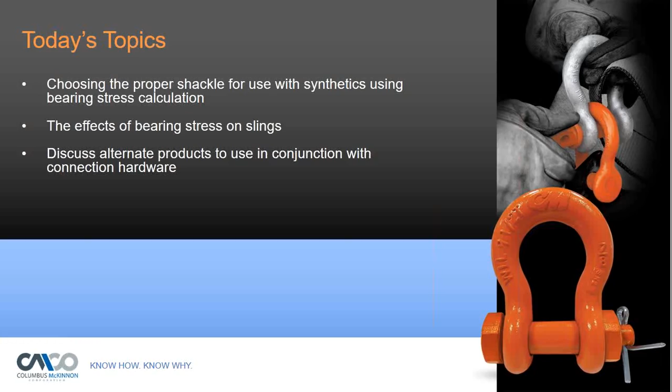Today we're going to go over choosing the proper shackle for use with synthetics using bearing stress calculations. We're going to review the effects of bearing stress on slings, and we're going to discuss some alternate products that you can use in conjunction with connection hardware. And most importantly, before you make any lift, we're going to go over some pre-operational inspection criteria and removal from service criteria per ASME standards.

Again, this information is intended for general purpose. None of this is a substitute for any of the government regulations or ASME standards. It's not our opinion. If you have any specific questions, we can definitely assist you and guide you to the right regulations or standards that would apply to that, and we'll be more than happy to help you out with any of those situations.

So for our sampling today, to do bearing stress, we're going to use a synthetic round sling, polyester round sling, and a shackle. Two commonly used rigging products that will be used for a standard lift. So with anything, it's very important that you do your pre-operational inspection. Per ASME B30.9-6.9.5 is the removal from service criteria for round slings.

What we like to see in the industry is prior to each use, the slings and hardware shall be inspected before they're used. So this is a good thing. So if you run out to your truck or you grab stuff off the crane, you want to make sure you're giving this gear a good look and a once over to ensure that it's safe for you to use, that it's free from damage and the lift can be made safely.

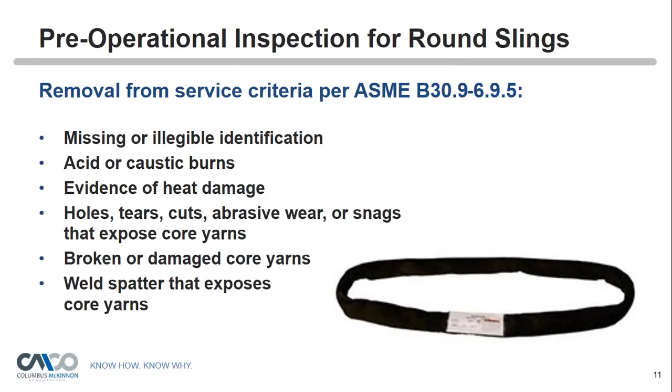So for the removal from service criteria for round slings: missing or illegible identification, acid or caustic burns, evidence of heat damage, which includes weld spatter, holes, tears, cuts, abrasive wear, or snags that expose the core yarns, broken or damaged core yarns, and again, weld spatter that would burn through the cover and expose the core yarns. Knots in the round sling, except for core yarns inside of the cover.

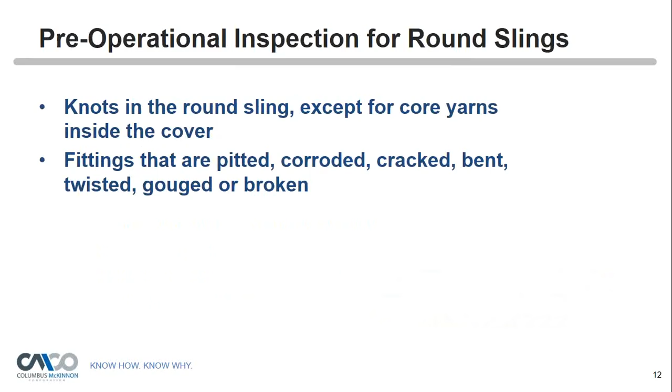And of course, if you have any fittings or attachments on your round sling, the fittings are pitted, corroded, cracked, bent, twisted, gouged, or broken. And of course, then you'd go on to follow the remove from service criteria for those fittings. Again, this is something that's very important. Lifts are dangerous enough as they are, so you definitely want to make sure prior to each lift or prior to each use, you're inspecting your equipment, especially with synthetics, and you want to make sure that they're free of damage and they're good for you to use.

Here's just some sample pictures of common damage you would see in polyester round slings. The tears in the cover, once it goes through both double walls of the cover and you expose those core yarns, that round sling needs to be removed from service. Any burning, charring, melting of the cover, the sling should be removed from service. Naturally, if there's any damage to the interior core yarns, you want to remove that sling from service.

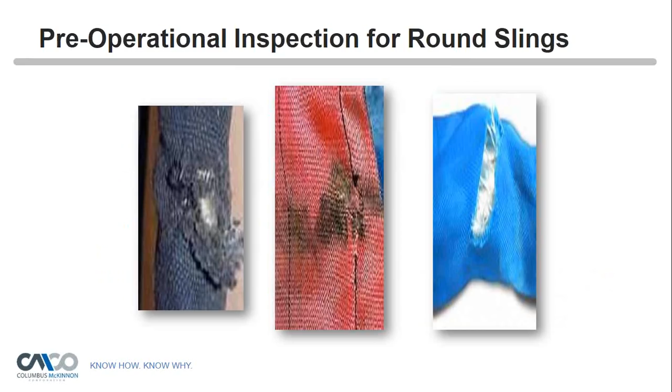Another thing that you also want to take into consideration is UV damage. A lot of times these slings are left in the back of trucks or in job boxes or on the side of cranes. You want to really give the sling a good once over. The sun can definitely damage the sling. You'll start to see discoloration in the covers and stuff like that. You protect your body from the sun. You definitely want to protect your rigging gear from the sun. So that's one more consideration for you to take into account when using synthetics.

Okay, I have a quick polling question we wanted to ask you, and if you can vote, that would be great. If you have an iPad and you're not able to vote, you can send us your answer via the Q&A pane. But let us know, a cut or tear in the cover of a round sling which exposes core yarns is a removal criteria from which ASME standard? Is it B30.9, B30.10, B30.16, or B30.26? We are collecting responses. Give me 1 minute.

Again, a cut or tear in the cover of the round sling which exposes core yarns is removal criteria for which ASME standard? Looks like the number one choice here is, let's see, 71% say B30.9, 14% B30.10, and the rest are divided. Rob, can you go ahead and comment on what the correct answer is?

Yep, so the correct answer for remove from service criteria for a round sling is ASME B30.9. B30.10 covers hooks. B30.16 is underhung hoists. And B30.21 would be lever hoists. Perfect. Okay, thank you. So ASME B30.9 is going to cover all your removal from service criteria on polyester round slings. 71% is a good number, though. We'll take it.

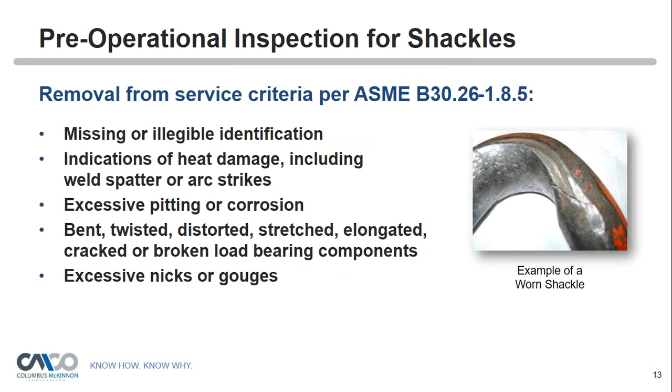Another thing we have to keep in mind is shackles tend to be used and abused. You know, guys throw them around in the back of the trucks. They throw them around on the construction site. You want to treat these things a little more delicately, as nicks and gouges can affect the overall working load limit of the shackle and can cause damage to where the shackle may fail or prematurely break. So we want to keep a close eye on those things.

Incomplete pin engagement. Oftentimes, in every rigging class we teach, we get asked this question about turning the shackle pin a quarter of a turn back. It was taught to me when I first got into rigging, and the answer is no. What the regulations and the standards say is you must have full thread engagement, and the shoulder of the pin must be in contact with the body of the shackle. Okay? It's the old wives' tale that you turn the pin a quarter turn back because when the shackle comes under load, the pin's going to tighten.

That is incorrect. There's a reason that shackle pins are flat and they have a hole in them for either a marlin spike or a crescent wrench. You want to make sure your pin is fully engaged and the shoulder of the pin is in contact with the body. You never want to go ahead and give that shackle pin a quarter turn back.

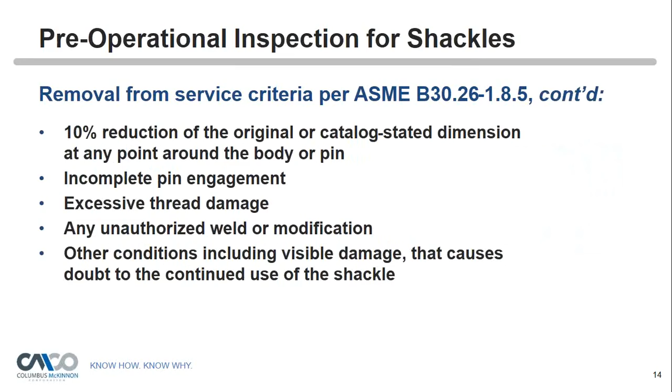Another thing you want to keep an eye out for is modifications to shackles. And I'm going to go ahead to the next screen. What you'll see is some good pictures of rejection criteria for shackles. Metal loss or modified. Sometimes the shackle doesn't quite fit, so some people will take a grinder to the inside. You're now modifying the shackle. You're removing material from that. We can no longer guarantee or state what the working load limit is once you go ahead and remove material.

Sometimes you'll see the substandard load pin. The guys will lose the pin on the job site, so they'll run down, they'll get a grade 8 bolt from the hardware store, and they'll put it in. And they say, well, the bolt's strong enough to hold up a building, it should be good enough for the load. Well, it's not from the original manufacturer, and we don't know what that pin is rated for. So you've got to make sure that you're using the hardware supplied by the manufacturer that coincides with that shackle.

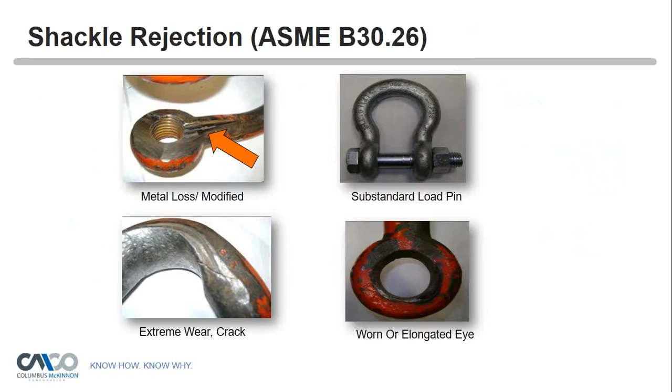And again, there's a better look at the extreme wear and cracking on the wear points of a shackle, on the bearing points. You also want to check the wear on your eyes. As those shackles are used and the pin's taken in and out, over time that eye will wear down a little bit. It's another area you really want to focus on. Just take a good look at it.

Again, once you remove material from that pin, we can no longer state or know what the true working load limit of that pin is. So you definitely want to keep an eye on that and do a thorough inspection, because you just never know what might have been done or what may happen.

Hey, so Rob, now that we... Oh, yep. Just one quick point. Could you elaborate a little bit more on the identification requirements? Like what needs to be on the actual shackle in terms of identification? So on a shackle, the identification is name or trademark of manufacturer, working load limit, and size. Okay. The working load limit stamped on the shackle is always what you go by.

The reason for that is, like at Columbus McKinnon, we have 3 different shackles: a carbon, a super strong, and an alloy. A 1-inch carbon, a 1-inch super strong, and a 1-inch alloy all have different working load limits. So you always want to go on the working load limit stamped on the shackle, not the size.

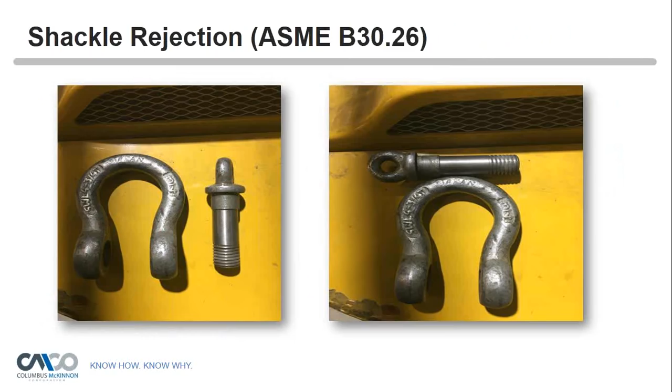Okay, I think we have another polling question. Sorry, keep going. I'm sorry.

Go ahead. No problem. Now we're going to get into bearing stress. It's WSTDA 4.7.1.1-4.7.1.3. Bearing stress, it's a quick and easy calculation, and as you know, in rigging we do a lot of calculations for load tension, sling angle, center of gravity, calculating overall load weight.

This is very commonly overlooked, and it's an important calculation because oftentimes the rigger will go grab a 15-ton sling and he's going to grab the closest shackle to meet that, which would probably be about a 17-ton shackle. And he says, my shackle meets my sling, both meet the load weight, I'm going to go ahead and make my lift. What bearing stress calculates is how much stress that sling's seeing in the working area of the shackle. So what WSTDA recommends for bearing stress value is 7,000 pounds per square inch or less.

The calculation, again, it's very quick. It can be done on the fly. It could be done in the field. Everybody has phones nowadays that have a calculator on it. So this is really one that should be done every time a lift is being made with synthetics and connection hardware. What we have to remember is the shackle has an actual width and then an effective width. So all shackles have a catalog width that the manufacturer puts out. The effective width is 25% less than that. So you times your actual width by 0.75, that's going to give you an effective width. That's the actual width that the sling can use, okay?

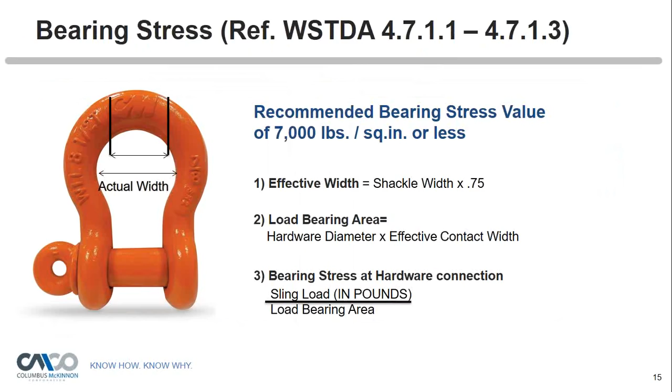So we're going to do a quick sample so I could kind of run through it with you guys and give you an idea of what this looks like and how to do it. So here's our standard shackle chart for Columbus McKinnon. We're going to use a carbon screw pin anchor shackle, and we're going to go with a 1.5 inch 17-ton shackle. The dimension we're looking at is that B dimension, which is all the way to the far right-hand corner, which is 3.50 inches. Okay, that's the actual width of the shackle.

So for this calculation, we're going to use a sling load of 29,000 pounds. We're going to use a size 9 round sling, which has a 31,000 pound vertical working load limit. And again, the shackle size is going to be 1.5 inch carbon screw pin anchor shackle, 17-ton working load limit. I chose this selection because we're going to be up there close to our full working load limit of the sling. Okay, so it's going to be very important that all of our calculations are correct.

And 9 out of 10 times, you look at this sling load, 29,000 pounds, you pick a little over 15-ton sling, you're naturally just going to grab the 17-ton shackle because everything works out perfectly together. So now we'll go ahead and do our bearing stress calculation. So our actual width of the 1.5 inch shackle is 3.50 inches. We're going to times that by 0.75. We're going to get a 2.625 effective width. Okay, so now we took our actual width, we did our calculation, we have our effective width.

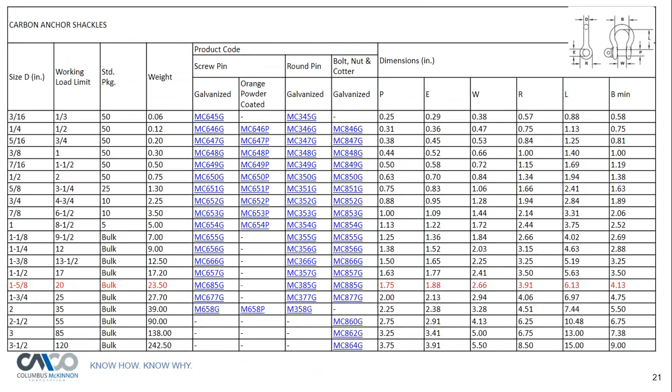We're going to use the same scenario, sling load 29,000 pounds, size 9 round sling, 31,000 pound vertical. We're going to use that 1 5/8 carbon screw pin anchor shackle with a 20-ton working load limit. We're going to take our actual width, which was 4.13, times our 0.75. We're going to come up with a 3.0975 effective width. We're going to take that effective width of 3.0975 times the 1.625 hardware diameter. We're going to come up with a 5.033 load bearing area.

Now we're going to take our sling load of 29,000, divide it by the 5.033 load bearing area. And you could see now we have a PSI of 5,761 pounds per square inch. Okay, so now we're below the maximum set forth of 7,000 pounds.

What I want to comment on and make note of is we went up one shackle size. Okay, as you go up in sling capacity, you get into these larger lifts, 70, 80, 90, 100,000 pound lifts or higher. One shackle size may not cut it. You may have to go up 2 shackle sizes, possibly even 3 shackle sizes to get your PSI under 7,000 pounds. So it's not always just going to be one jump up. Depending on the sling load and the size, you may have to go up a couple different sizes to get to where you're under that 7,000 pounds.

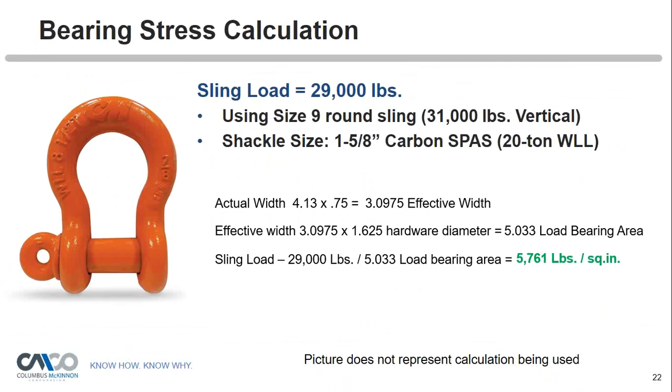Okay. Why is this important? Well, it has some severe effects on synthetics. When your PSI is over 7,000 pounds, what they found is it tends to create tears, punctures, rips in the sling cover. It may even, depending on how much it is, cause a sling failure. And again, all those fall under ASME B30.9 removal from service criteria. So as soon as you use that brand new sling in a situation where your bearing stress was too high, you could be removing it from service right away.

Excellent. Thank you. We're going to do another quick poll. This one is: the WSTDA recommends a bearing stress of what PSI or below? Is it 9,000, 8,000, 7,000, or 6,000? Again, the WSTDA recommends a bearing stress of what PSI or below? 9,000, 8, 7, or 6.

Oh, it looks like it's split between: 96%, Rob, say 7,000 and the other 4% say 9,000. What is the correct answer? The correct answer is 7,000 PSI or below. 7,000 PSI or below. Excellent. Well, we had a very good proportion voting on that. Thank you.

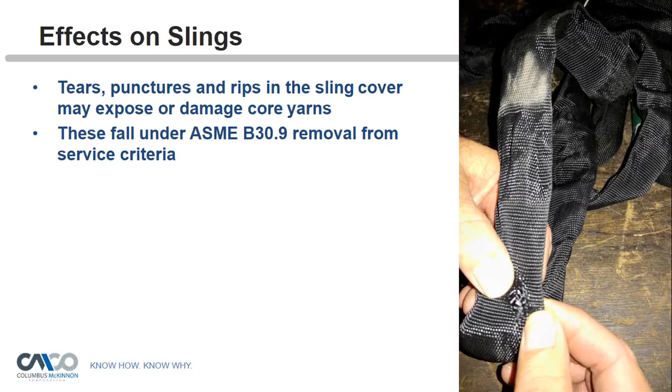So the next slide, I'm going to cover just some alternatives to the shackle connection. This is something that Columbus McKinnon has come out with. It's the CM Weblok Assembly. Working load limits up to 75,000 pounds. Available in 6 different sizes from 3/8 inch to 1.25 inch, 5:1 design factor, 100% proof tested, meets ASTM A952 and WSTDA RS1 standards.

This is going to be an alternative for connection devices on synthetics. As you can see, you have your common hammerlock or connecting link connection up top, and then your orange is a synthetic sling fitting, okay? If you reference back to the WSTDA standard, you have to deduct part of the width, your actual width to your effective width, due to the rounded surface. Because that sling connection device is flat, there's no deduction. You get 100% actual width, actual working load of that area. So just by flattening it out, we take no deduction in width, so we hold full capacity on that.

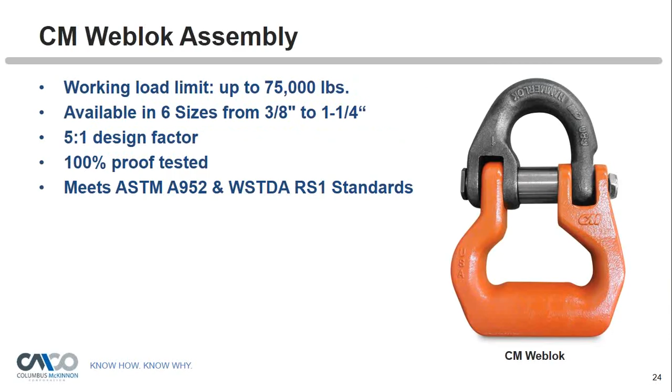With our Weblok, it's an integrated design, again using the hammerlock coupling link and a synthetic sling attachment. So the hammerlock was that gray piece on top. The synthetic sling attachment was the orange flat bottom. We also did double retention for added safety. So unlike anybody else in the industry, we've gone one step further for that load pin and stud that's on a typical connecting link. On the Weblok, we did a double load pin retention system. We used the traditional bolt and stud. We also extended that bolt, threaded it, and put a lock nut on that.

So there are some concerns in the industry: if that stud failed or came loose or cracked off, how do we keep that load pin from sliding out and ultimately dropping the load? Well, we took those concerns and we engineered a device very, very similar. The only difference is we threaded the end of it, and now you have a lock nut. So you have a double retention system. In case that stud in the middle disengages for any reason, that load pin's still not going to come out. It's very unique to the industry, and I think it's going to be great for added safety to the products and your lifts.

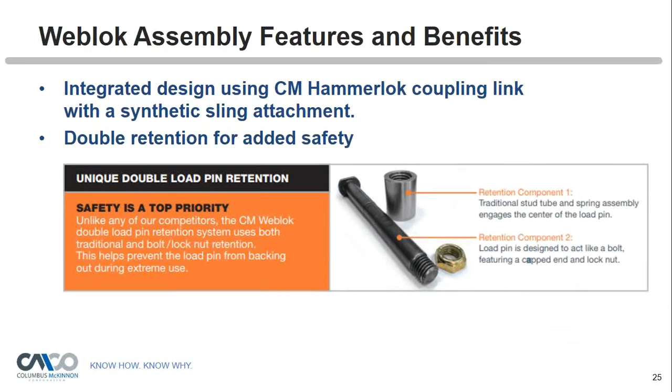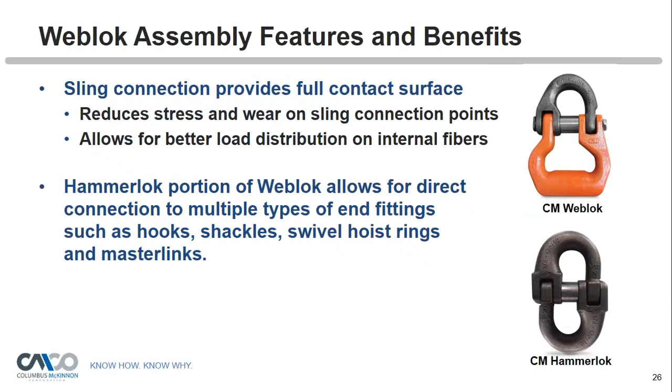As I stated earlier, with the CM Weblok, the sling connection provides full contact surface, being that it's flat. It reduces stress and wear on the sling connection points and allows for better load distribution of your internal fibers on your synthetic slings. Again, on a rounded surface, you have to take that deduction in your width, and then you have bearing stress. With a flat surface, you don't have to concern yourself with bearing stress because you're getting 100% of contact. The Hammerlok portion of the Weblok allows direct connection to multiple different types of end fittings, such as hooks, shackles, swivel hoist rings, master links, anything like that. So these are very universal in what you can connect them to.

One of the great things about Webloks, where I've seen them used in applications, is a lot of places are going to dedicated lifts. What that means is they buy a 4-leg bridle to lift a particular part. That bridle stays in that job box at that part. That's all it's used for. What's nice about the Webloks is you never have to worry about somebody going in there and unshackling a sling because they can't find one around.

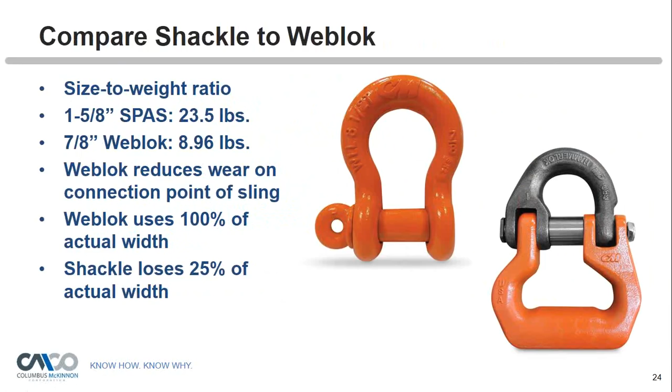I think the biggest thing is when you're connecting hooks, you'll get a lot longer life out of your synthetics if you use a Weblok to that hook rather than putting the hook directly on the synthetic. Okay, excellent. Should shackles be magnafluxed?

Not unless it's your own company's requirement. There's nothing in any standards that states you need to do that. If your company or your division requires that, by all means, you're going above and beyond the standards, but none of the standards require you to do any of that to shackles.

Okay. Working in entertainment, often we're trying to hide our rigging equipment so it blends in. Is there any issue related to spray painting shackles?